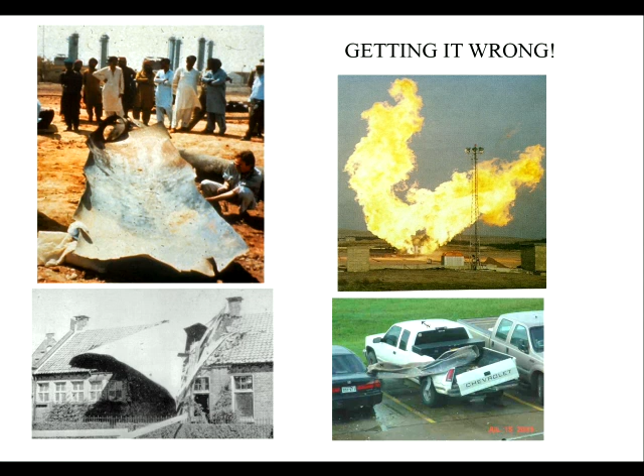So what I want to do this week is give you an introduction to the subject area. We're going to look at what properties do we need to specify for pipeline materials. Because if we've got to write an order, if you're going to a pipe mill and say, I want 1,000 metres of pipe, what do you put on the order? What do you have to say? What are the characteristics of that pipe that we have to write down?

And there are 3. Strength: there's an internal pressure in the pipe that must resist, so it must be strong enough. Toughness: that's resistance to cracking. If there's a defect in the pipe, the crack mustn't be too bad. It must be stable, but it mustn't grow. We'd rather these things leak before they break.

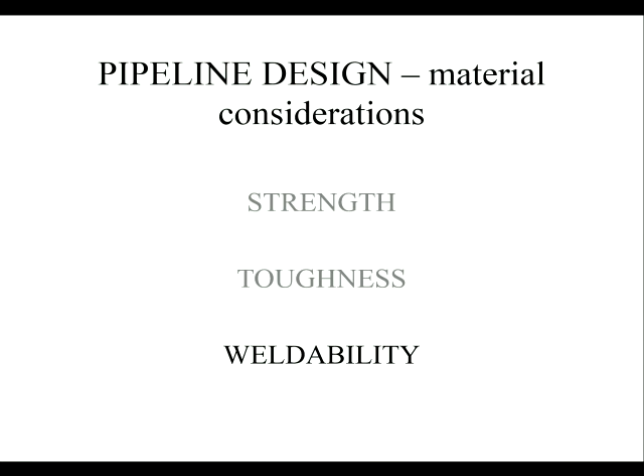And finally, weldability. You're going to have to make a pipe in short sections and join it, so you're going to have a material which can be field welded, and not one that requires special conditions and very expensive gases and things like that. So we've got to specify a material capable of delivering the requirements in all of these cases. That sounds easy.

Let's look at that and unpick that. So, strength. Most people in the industry know about mechanical tests because they'll have to do that as proving tests all the time. The simplest test you can see here is a standard stress-strain test where we take a metal test piece, in this case a cylindrical bar with some end pieces on it, and we pull it in this test frame, so we stretch it, and we measure the force.

And what you can see also on this picture is this thing called a clip gauge. You fix that on, and as you pull it, the clip gauge opens up and can measure the extension. So you get a force versus extension plot. If you know the original area, force divided by original area gives you stress of the sample, cross-sectional area, and extension divided by original length gives you strain. That normalises for different sizes of sample, and you end up with a stress-strain curve.

So most steels made for pipelines, particularly the old normalised steels, the original pipeline steels developed in the 40s and 50s, have this sort of stress-strain curve. You get an elastic part, then some sudden wobbles, a serrated yield point they call it here. Then you get work hardening, and the stress goes up to an ultimate strength. At that ultimate strength, you get what's called a plastic instability.

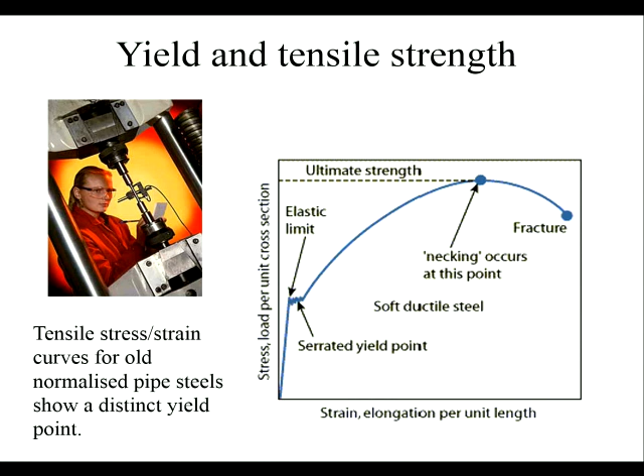Now that's an old steel. If I took a piece of pipeline steel from today, it would look something like this. And by the way, if you go onto the Blackboard system, you can download the PowerPoint files here.

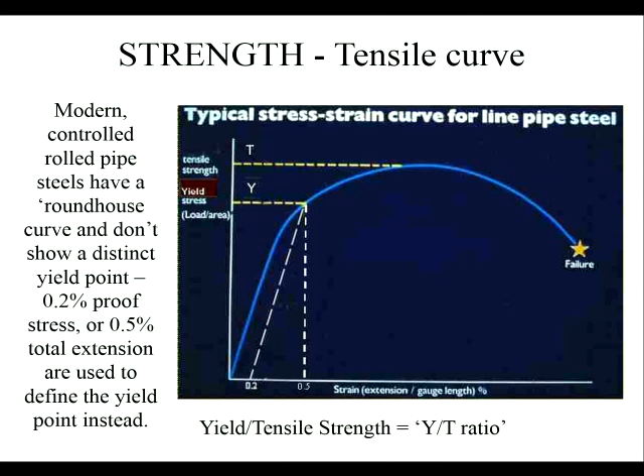Now why is this important? Well, because the basic calculation we do about strength in a pressurised pipe comes from Barlow's formula. So if you imagine a pipe of diameter D and wall thickness T, the assumption in this equation is that the pipe diameter is very much greater than the wall thickness. Then the stress in the pipe wall is the pressure times the diameter divided by 2 times the wall thickness. There are very many proofs in mechanical engineering textbooks about this, but that's a very standard result.

Now sometimes you'll see PD over 20T, and that's just because the units are different. The equation is exactly the same, but if we put the pressure in bar—1 megapascal equals 10 bar—you get a factor of 10 appearing in the equation. So you notice here I've put the units, and the units of stress are pascals, or 10 to the 6th pascals, megapascals, which is just the same as newtons per millimetre squared. So if you measure the cross-sectional area in millimetres squared and the load in newtons, you can get the stress in megapascals directly.

So if we measure everything in millimetres, it becomes easy. The oil and gas industry, because it's got a lot of US parts to it, is very good at using mixtures of units and not always the SI units that we would like to use. So be very careful what unit set has been used, because they will mix bars. I've seen equations with pounds per square inch and meters in the same thing. So that gets very confusing after a while. So always, if you're going to use an equation, write the units down.

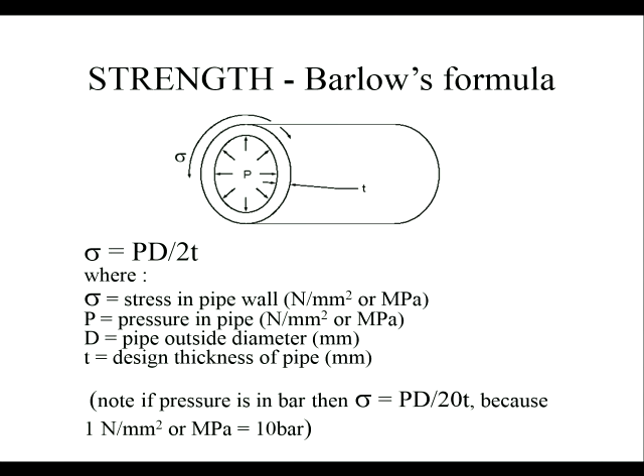So we usually have what's called a design factor included in our equation. The design factor that I use is the stress in the pipe wall at the maximum working pressure divided by the minimum specified yield strength of the pipe. The minimum specified yield strength is a measured value. It's not an average value, it's the minimum value that you would get from your tests. And that's very important because we don't want things to fail. So we don't want to use an average value where the chances are things will be smaller than that. We want to use the minimum value.

And then we multiply that by some factor, or in this case we're dividing by a factor, just to say what we would want. So the stress in the pipe wall, sigma, then has to be reduced, or has to be increased, to get up to the yield stress.

So a way of looking at that: we've got the stress-strain curve here, S. This one's got the yield drop, so it's an old steel. We can see that the yield stress is marked there, but we would actually design at a fraction of that, 0.72S or 0.3S, you can see there. So those would be the design limits for the stresses in that particular material, and it's less. If we do that, everything should be in the elastic range, and we always design with things in the elastic range.

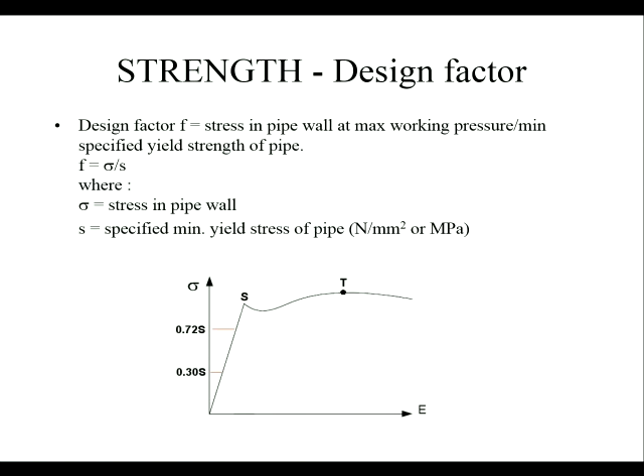And you can choose different safety factors, different design factors, depending on circumstances. So typically, the design factor we use for buried cross-country land pipelines, where everything is out of the way, no people near it, is about 0.72, maybe up to 0.8. So you can use pipes near their limits under those conditions.

Proximity land pipes, that's things that go near houses or roads or things where there might be some damage, we will drop that design factor typically down to 0.3. For very thick pipes—

So wall thickness greater than 19 millimetres—I put 19.05 because it comes from a standard, that's what they chose—you can actually put that safety factor up. So if you've got a really heavy wall pipe, generally they're safer than the thin ones.

At stations, that's things where people might go but don't usually go, so pumping stations, pig traps, compressors, all of those sorts of things, we might have a higher safety factor than the minimum because people go there, but we don't go right down to the lowest.

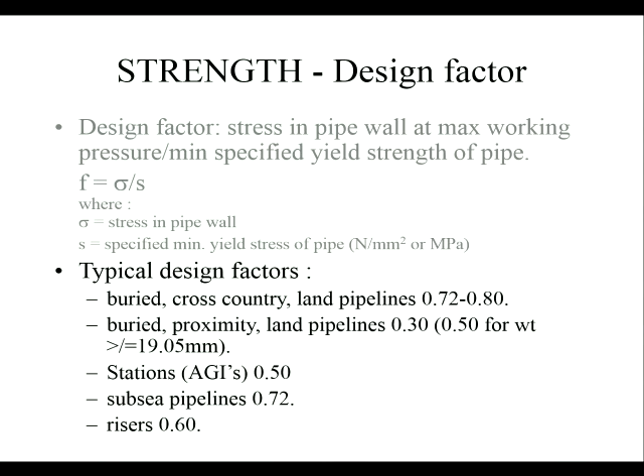Right, how do we define the materials then? Well, the American Petroleum Institute, API, has a standard line pipe specification—the 5L specification. There are various different grades of steel that can be used to make line pipes defined in this specification, and here is an example.

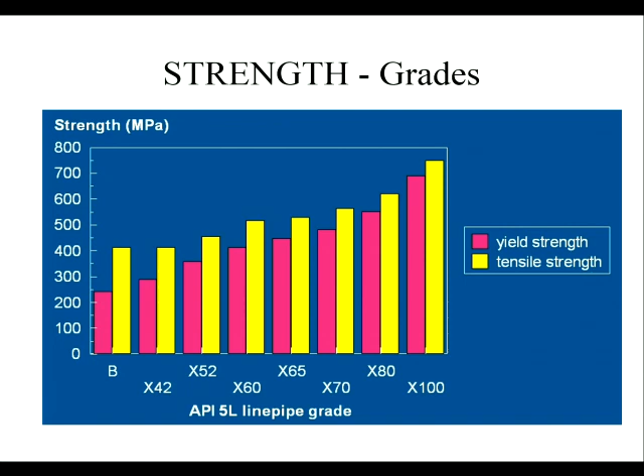So up to about X80 are specified and widely used. You can get X100 and X120 and even X200, but they are experimental grades, very rarely used. I think X100's been used on one set of pipelines in Canada, and the Japanese have produced it, been trying to sell it for some time, but the industry moves very slowly. In this country, X70 used to be the limit, and X80 was unusual. Now X80 is quite widely used, but that's about where we've got.

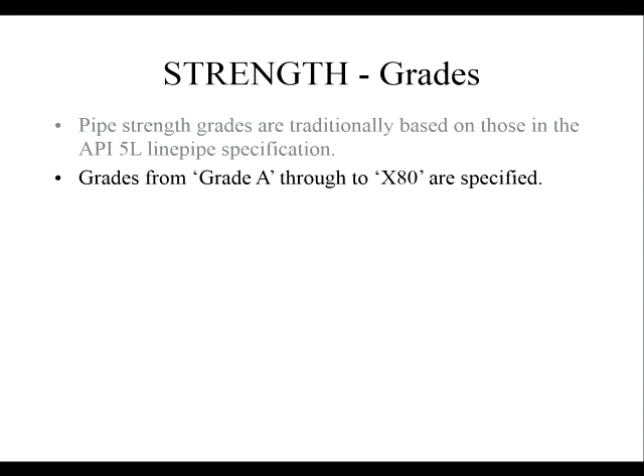So X100 is not there yet. No. So, yield strength of the steel in KSI, the 80. That's fairly straightforward - it means that we can guess what the mechanical properties are just from the grade of the steel.

For onshore pipelines, grades up to X70 are commonly used. As I said, in the UK we've put some large gas distribution pipelines around the country. Now we've got a lot of gas-fired power stations, and the spine pipes, the big pipes that deliver the gas around the country by Transco, are made at X80. That's been really in the last 10 years or so that we've started to do that. But most of the installations are less than that, and if you ask me the most common grade, it's probably X65 around the country.

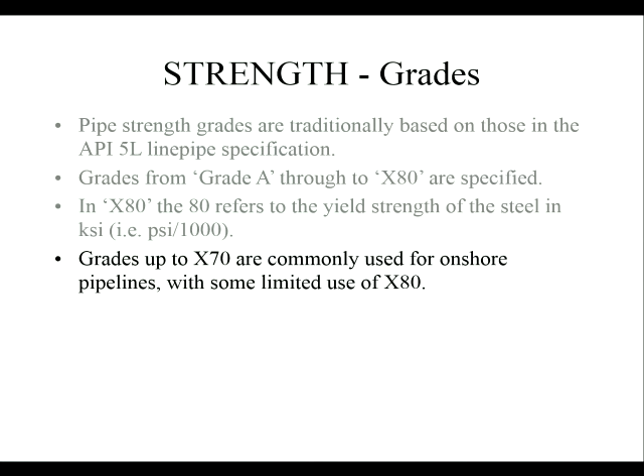As I said, X100 and X120 steels do exist. They're more expensive because they're a bit more highly alloyed, but nobody uses them yet. Though TransCanada have been trying them out. There are various reasons why you might - if you were in a very cold country, if you can modify the steel specifically for its ductile brittle transition behaviour, you might want to do that rather than spend the extra installation money dealing with heavier pipes. Because if you've got a higher grade steel, the wall thickness of the pipe will be smaller and they're easier to transport. Some people like that as a way of doing it if you've got hard-to-transport runs.

X65, commonly used for offshore pipelines. Certainly in the North Sea, where most of our gas comes from, everything was worked out for X65 when the gas exploration started, and X65 works, so why change something that works? That's pretty much why it's there. And you have to get a higher degree of confidence in your materials if you're going to put something offshore, because if you put it on the bottom of the sea, you can't go in and repair it very easily. It's very expensive. So we tend to use very conservative, old-fashioned maybe, but tried and tested methods for working there.

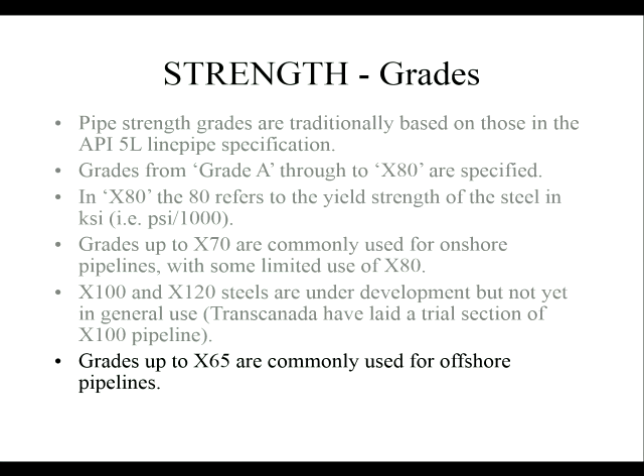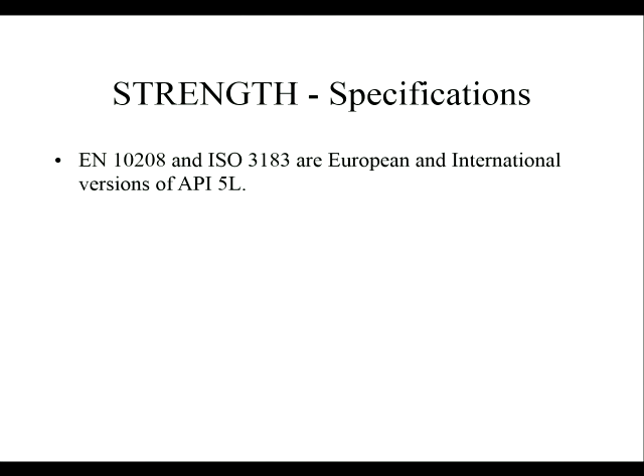Now, of course, the Americans have a standard, and there's an international standard, and it's almost the same, but not quite. The European standard 10208 and the ISO 3183 are just the European and international versions of the API 5L. But because standardisation people like to work in more straightforward systems, they metricate the API 5L versions and convert them, or round them to the nearest 5 megapascals. So an ISO 3183 and an API 5L steel are not quite the same - they're almost the same, but not. So if you're working to one standard, make sure you're working to that standard and not the other one. Know which one you're doing.

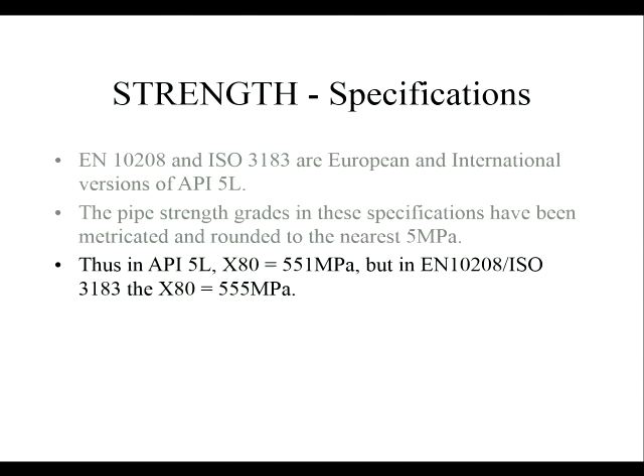So if you take API 5L X80, if you work out what that is in terms of KSI and then convert that into megapascals directly, you'll get 551 megapascals yield strength. But if you look at the international standards, the standard for X80 is 555 megapascals. So it's nearly the same, and frankly it doesn't really make a great deal of difference when you do the calculations. Because if you're worried about 4 megapascals on 550, there's something seriously wrong with the design process.

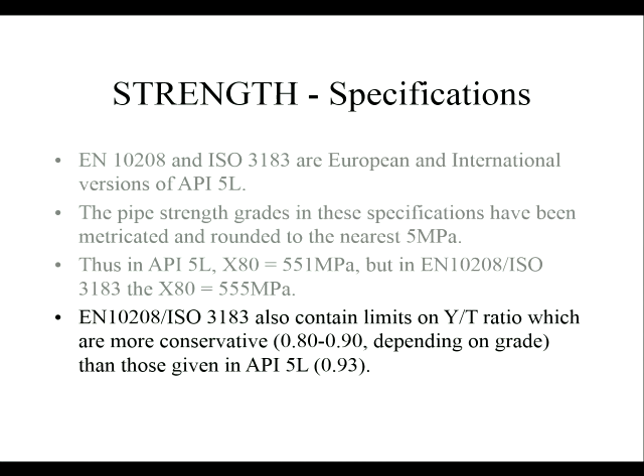EN 10208 contains a limit on the yield stress to ultimate tensile stress ratio, which is more conservative than those given in API 5L, typically around 0.9 as opposed to 0.93. So what that says is that we don't believe in Europe that you can go as close to the limit with these materials as the American API 5L system will say. You need that extra work hardening in hand to allow for overstress beyond the yield stress limit. It's not a big difference, but it can be significant in some cases. So that's one of the differences between the standards, and the ISO standard is marginally better, but again it's not a big deal.

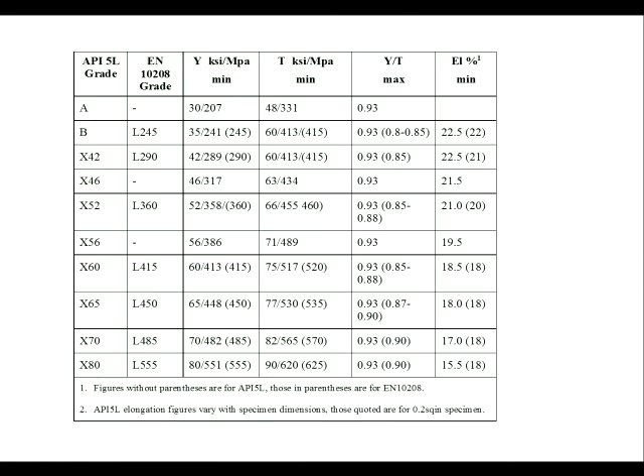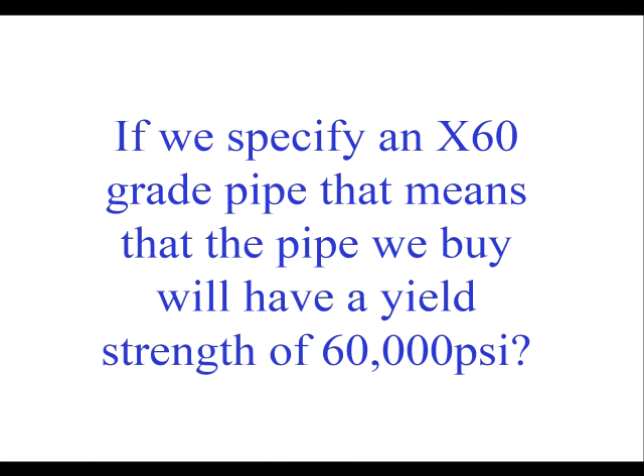So if we specify an X60 grade pipe, that means the pipe will have a yield strength of 60,000 psi. Is that right? At least, is the simple answer. It should. So these are minimum specified grades.

So just because it says X60 doesn't mean to say that a particular pipe from that run is actually X60. It means it's a minimum of X60. And you might find, if you did tests on individual pipes, that one pipe was X60, the next one was X65, the next one was X70, then we had another X60. So the pipeline strength can vary, but none of them will drop below 60,000.

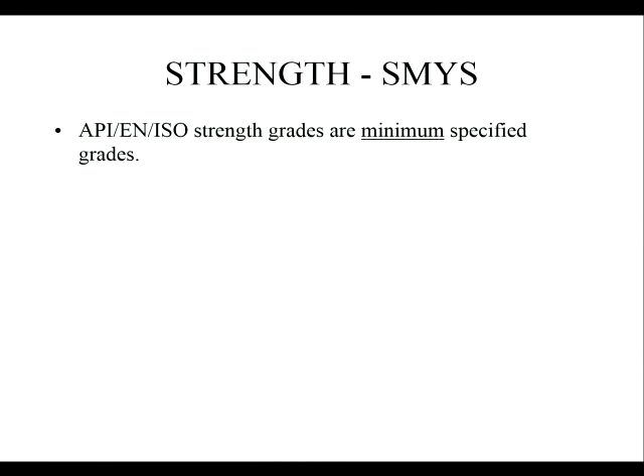So the pipe manufacturer accounts for variations in pipe strength due to variations in steel composition, plate rolling conditions, and pipe manufacturing conditions by actually trying to make a steel grade with a higher value on average of the properties, and checks 3 standard deviations below the average to make sure that none of the distribution goes below the minimum value that's specified.

Now it's impossible to make something that will be perfect, so there will always be the odd piece of pipe which won't meet the specification. But on average, when you sample the material, they should all be greater than that minimum yield stress.

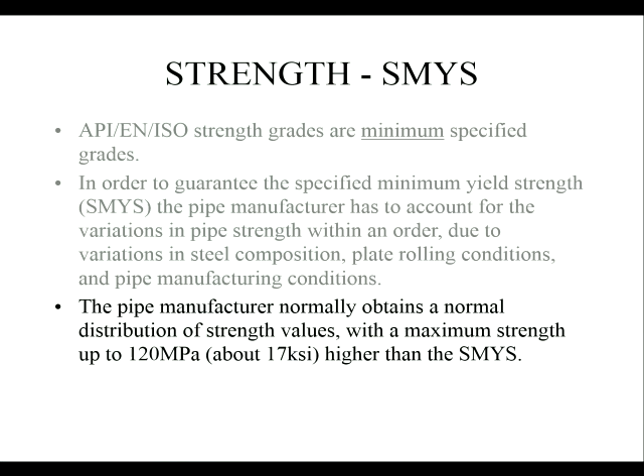The maximum strength may be 120 megapascals more, or 17 KSI, or 17 X units higher than the minimum. So you get quite a distribution of properties. And this can be a problem, because if you're matching your welding properties to the properties of the steel, which one do you match it to? The minimum or the maximum? So that is an issue.

So we have this idea that X60 can have some X77 in it, and when we want to weld this, what we want to do is overmatch the weld. That means we want the weld metal to be the strongest thing in the system, so that the weld doesn't fail, the pipe fails. So you don't do that based upon the minimum.

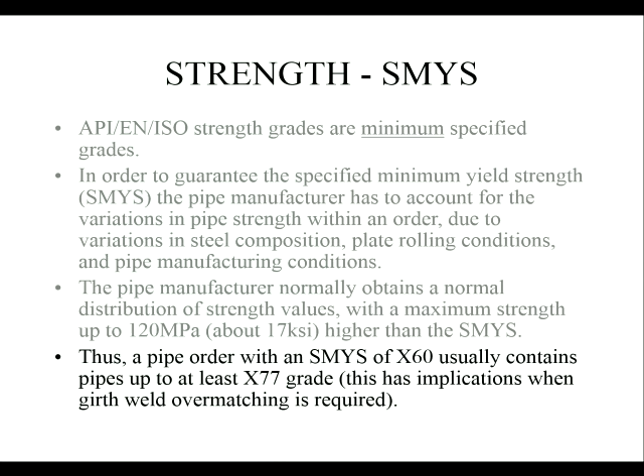So, what does a handbook value say? The yield stress of this steel is 555 megapascals. It doesn't say, and it has a distribution of 120 plus or minus 60 megapascals around that. You have to know that, you have to measure that, and you have to check that that is what you want. Or what you do is you say to the steel companies, I want a material that has got this minimum yield stress, and we're going to sample some of the things that you send us to check that you're within that specification.

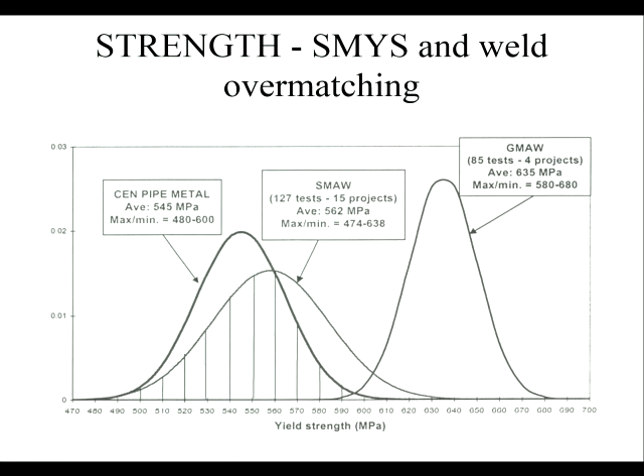So how do we do that? Well, the standard test method for a piece of pipe is called the API strap tensile test.

You cut a section of pipe out, cut in the hoop direction around the pipe, and then put it in a press and flatten it. Then you cut some restrictions on each side to form what we call the gauge length, machining it to the shape of a tensile strength test, and then we test it.

So it's not the same as just machining it from bar stock. There will be some contribution from the fact that it was made into a pipe before you did that. Typically, the hoop direction is the main direction where you want to have the strength, because the pressure inside is trying to expand the pipe, trying to increase its diameter, and that's where the main information is.

For small pipes, sometimes you can't do that because you've curved it too much. So then you can cut it in the longitudinal direction, but that's not so good.

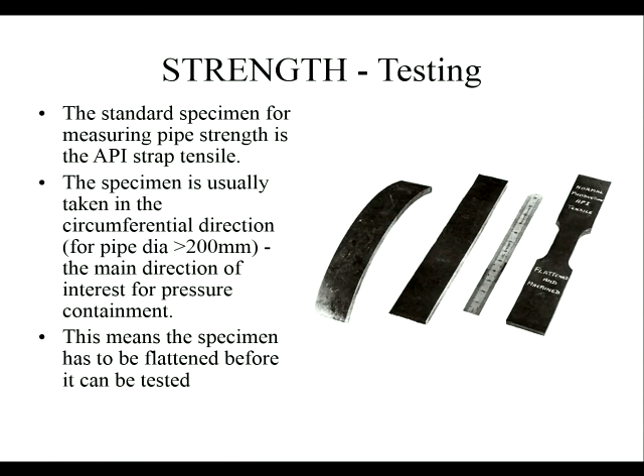What flattening does is actually reduce the yield strength that you measure. Because if you imagine bending something one way, you've put some plastic deformation in, creating dislocations, which are responsible for plastic deformation. When you bend it back the other way, the dislocations already created can move in the opposite direction — they've already been created, they just have to be moved. The usual result is that the yield strength drops when you measure it in the opposite direction.

So if you bend it one way and then bend it back, you will have effectively reduced the yield strength. This is called the Bauschinger effect: when a material is plastically strained in one direction, the measured yield strength in the opposite direction is reduced.

That's good because you're measuring the minimised yield stress, and if that still meets the specification, then the original would have done. So we often just assume this is an extra safety factor.

But if your design is on the edge, and you don't want to worry about whether this Bauschinger effect varies from sample to sample, you might want to do a more complicated mechanical test. So in critical designs, you might have a more accurate measurement. But getting a more accurate measurement is expensive, so people don't tend to do it.

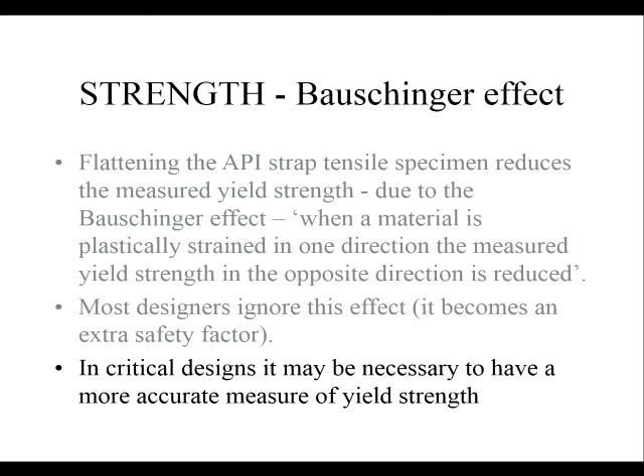The other thing you can do is a longitudinal test — along the length of the pipe instead of around the circumference — they don't need flattening. But because of the way the pipe's been made, they measure a lower yield strength. Again, there's a problem because it's not measuring in the direction of loading, and it will come out slightly lower. But if it's lower and still meets the specification, that's probably all right.

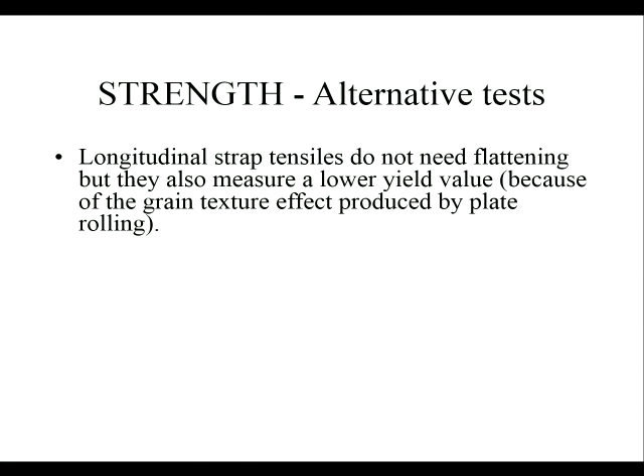Sometimes you can cut from the pipe wall a round bar test piece, a much smaller test piece from inside the wall — you have to do a lot of machining to do it. This usually results in a higher value of yield strength, because it hasn't got all the surface defects from the pipe which contribute to the behaviour you measure.

But sometimes, for some designs, it's the only way to get a decent, reliable sample. If you've got a heavily deformed pipe surface, every measurement you take can give a big scatter in results, so you try to pick more reliable tests just to check the basic material rather than the material and its manufacturing process, which is what we're doing with the API strap test.

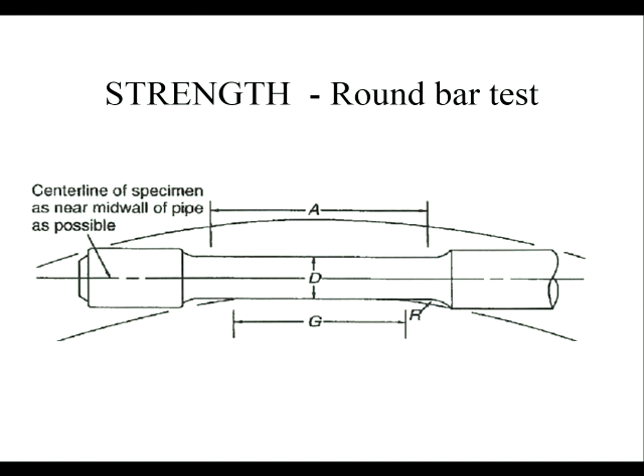What happens if you have to test the whole pipe, because you're absolutely critical and don't want any Bauschinger effect questions? Well, you do what's called a ring tension test. You cut a whole ring, a whole hoop of the pipe, put it in the test machine, expand it and measure it. That's the closest we can get to an absolute measure of pipe behaviour.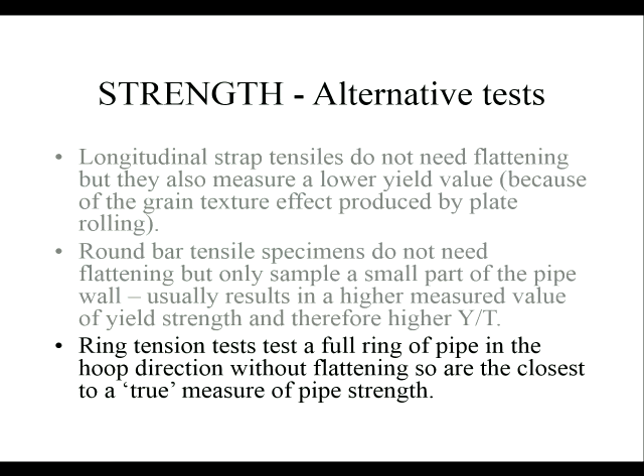So that's a ring tension test system. Here's the pipe, and there are gauges that measure the diameter of the pipe to measure the strain. There's usually a cam-driven system in the middle which expands the central part outwards to provide the stress on the system.

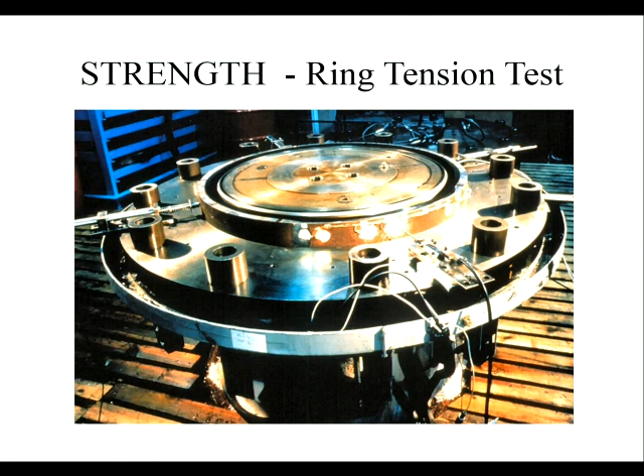Clearly that's a much more expensive test than the simple tensile tests, but you can do it. What people have done is compare the two to give you an idea of what to expect. We've got ring tension test data at the bottom and flattened strap tests from the same materials at the top, with data points for different grades of steel, going from X50 up to 85 or so.

If there was a perfect match, if they gave exactly the same results, all the data would fall on that 45-degree line. It doesn't. Up to about X60, the scatter of data is such that you probably couldn't tell the difference between the two. But above that level, you can see that the strength measured in the ring tension test is different than you would have got otherwise.

The flattened strip value is lower than the ring tension value. There's still quite a bit of scatter on those data points, so you can't predict the effect of the Bauschinger effect on your results. All you know is, in general, it's on the safe side. Nothing falls above the 45-degree line, so that's pretty good. Within experimental error, some are very close to that line, but there isn't much to worry about.

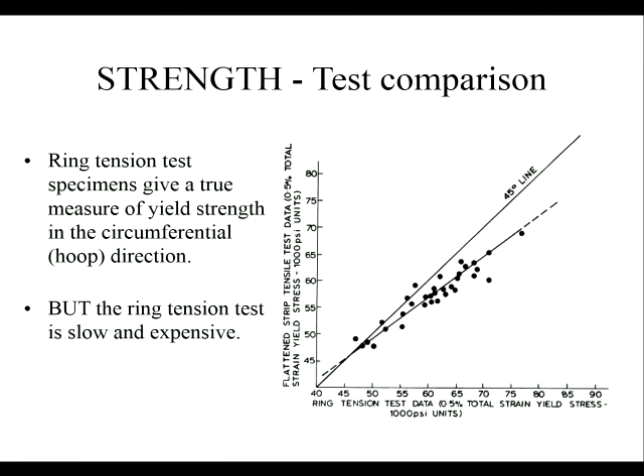So in summary, flattened API strap test specimens are mainly used because for grades up to about X60, they're pretty much identical to any other test. Round bar tensile specimens are often used for the highest grades because they're less susceptible to defects, and those are the more brittle materials.

Ring tension tests are reserved for the more critical systems where you want to know things very accurately, particularly in development work. As we go to higher and higher grades of steel, they'll become more important because of the deviations from the strap results.

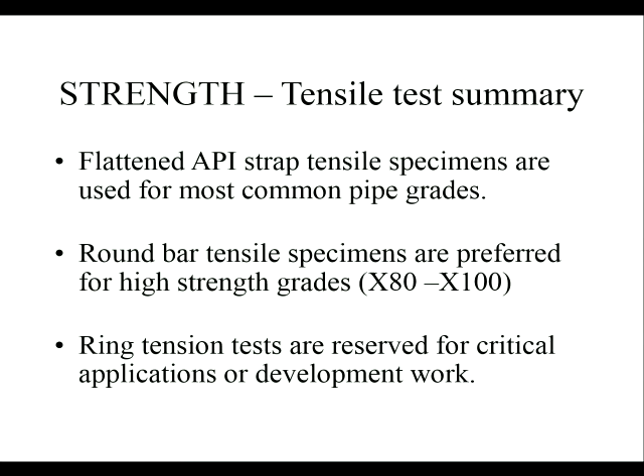You also get a lot of information by looking at the failures in these strap tests. So this is the end - these are the two pieces that have been pulled apart. This is the fracture surface, laid end to end so you can see them. Just by looking at that, you can see that down the centre of this steel pipe there is a failure, a crack running through it.

This is caused by segregation bands in the parent metal layer. You may think that's a horrible failure - we can't have that, we must reject this. Actually, a thin band of segregation in the plane of the pipe doesn't affect the load carrying capacity of the pipe at all, so generally those are ignored, although they look pretty bad. Imagine the top and bottom part of the pipe carrying all the load, with just one very thin line down the middle that isn't.

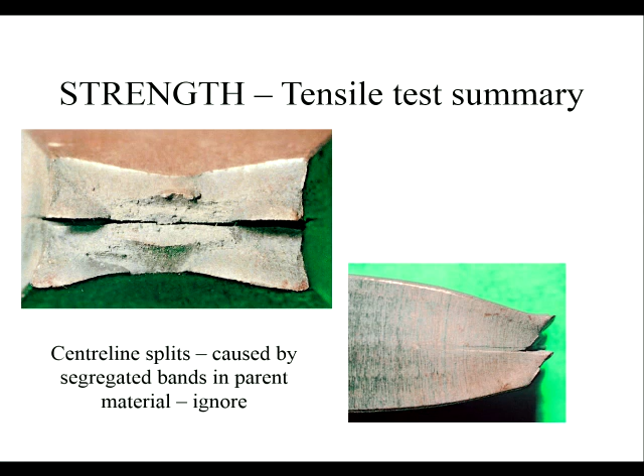You can imagine a wave at each end supporting the boat and nothing in the middle, so the whole weight of the boat acts downwards. There's a bending stress, maximum tensile stress at the bottom, a defect, and a crack runs up. So the toughness hadn't been taken into consideration, the strength had. This was the right thickness of steel, the right loading conditions, but it couldn't cope with the defects present, and the toughness of the steel was not good enough.

So we developed ways to look at how to improve steel toughness over the past 50 years or so, and Dr. Euler will say a little more about that in the next lecture. So that's where I'll stop. Anybody got any questions? I'll happily take them. If not, thank you.